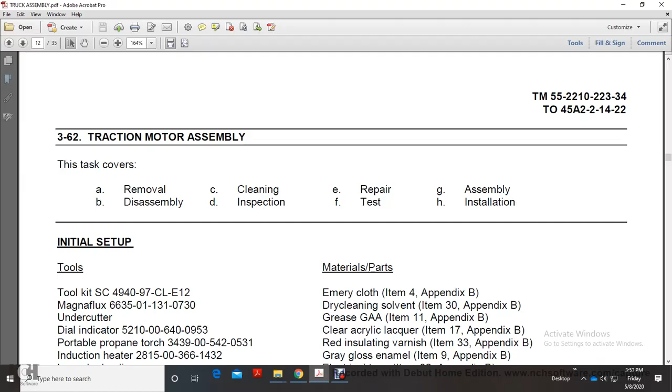Condition description: truck assembly removed. Removal warning: when the traction motor or under-locomotive equipment must be inspected while the engine is running. Remove excitation from the main generator, set air brakes, move the reverser to center position, remove from the controller to prevent accidental movement of the locomotive and possible injury to personnel.

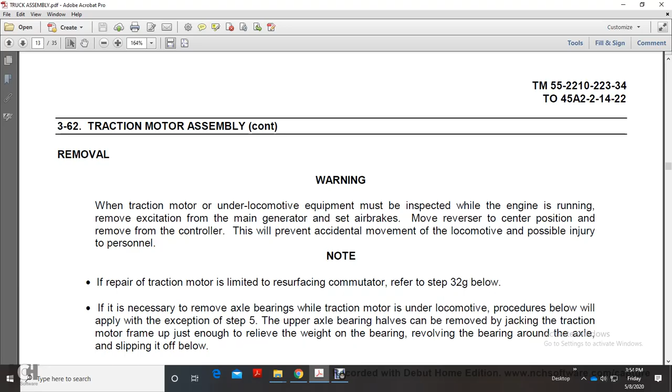Note: if the traction motor to be repaired is limited to resurfacing the commutator, refer to step 32g. If it's necessary to remove the axle bearings of the traction motor under the locomotive, the procedure below will be applied with the exception of step 5; the upper back axle bearing halves can be removed by jacking the traction motor frame just enough to relieve the weight on the bearing, revolving the bearing around the axle, and slipping it off.

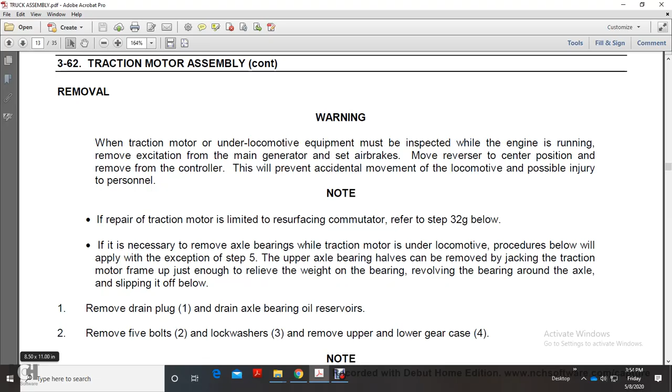Remove the drain plug to drain the axle bearing oil reservoirs only. Remove the five bolts (2), lock washer (3), rear upper and lower gear case (4). Note: the traction motor must be blocked with the wheels supported, and the wheels must be removed from the traction motor.

If the axle bearing cap (7) is stuck, a flat cold chisel may be used to loosen the cap. Place the chisel in the crack between the cap and the motor frame, and tap the cold chisel on one side or the other until the cap is loose. Remove the 8 bolts (5), lock washer (6), and axle bearing cap (7).

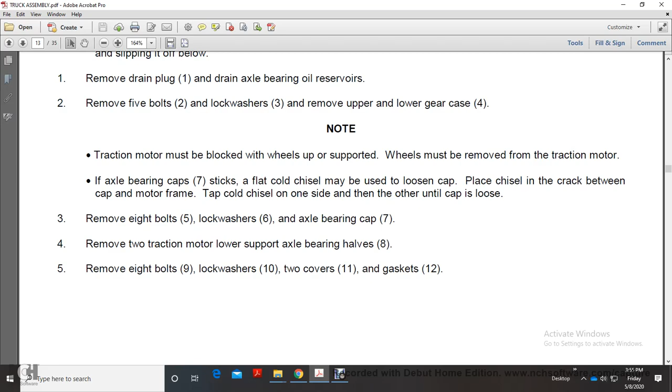Remove the two traction motor lower support axle bearing halves (8). Remove 8 bolts (9), lock washer (10), two covers (11), gaskets (12). Remove 4 bolts (13), lock washer (14), two felt wick lubricators (15).

Warning: components of the locomotive are heavy and awkward to handle. Use correct lifting procedures, including lift device assistance and other personnel, to avoid injury. Use a suitable lift device to slowly lift the traction motor (16) from the wheel and axle (17). Remove the traction motor upper support axle bearing halves.

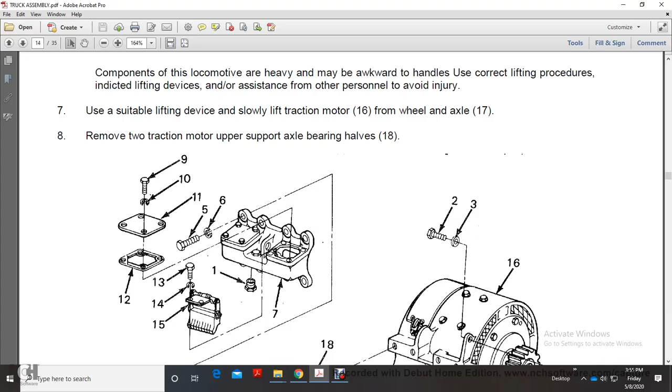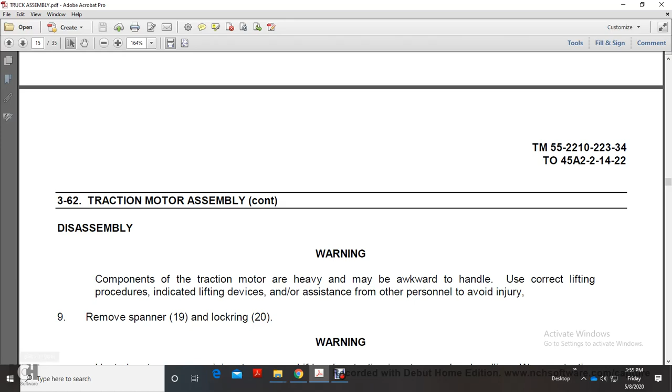Disassembly warning: components of the traction motor are heavy and may be awkward to handle. Use the correct lifting procedure, including lift device assistance with other personnel, to avoid injury. Remove spanner (19), lock ring (20).

Warning: heated parts may cause injury to personnel if hand protection is not worn. Wear protective goggles and gloves for maximum protection.

Original heat treatment will be affected if it becomes necessary to remove the pinion; it must then be scrapped. If it is very hard to pull, it may be necessary to apply heat to the pinion for a very short time. Pinion shafts and traction motors must not be heated, or damage to the parts will result.

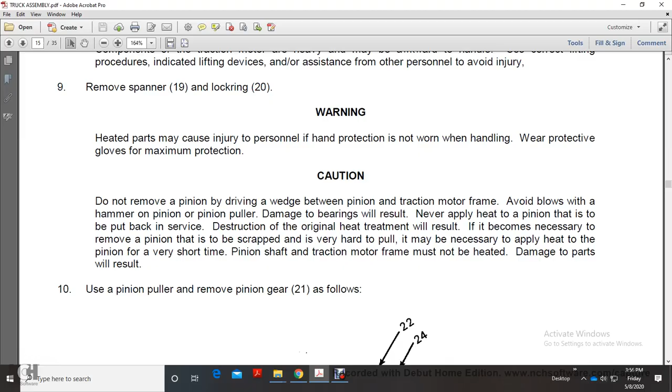Warning: dry cleaning solvent PD680 is toxic and flammable; wear protective goggles and gloves. Use only in a well-ventilated area. Avoid contact with skin and eyes. Do not breathe the vapor. Do not use near open flame.

Excessive heat: flash point of 100 to 138 degrees Fahrenheit. If you become dizzy, get fresh air immediately and get medical aid. If contact with eyes occurs, wash your eyes and get medical aid immediately.

Compressed air used for cleaning purposes must not exceed 30 psi. Do not direct compressed air against the skin. Use goggles and a full face shield.

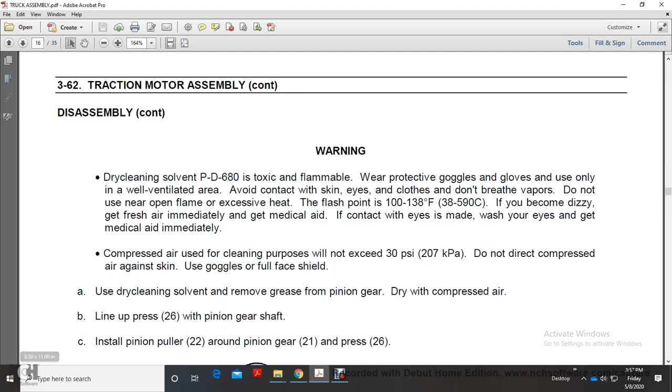Use dry cleaning solvent to remove the grease from the pinion gear, then dry with compressed air. Line up press 26 with the pinion gear shaft. Install the pinion puller around pinion gear (21). Press 26.

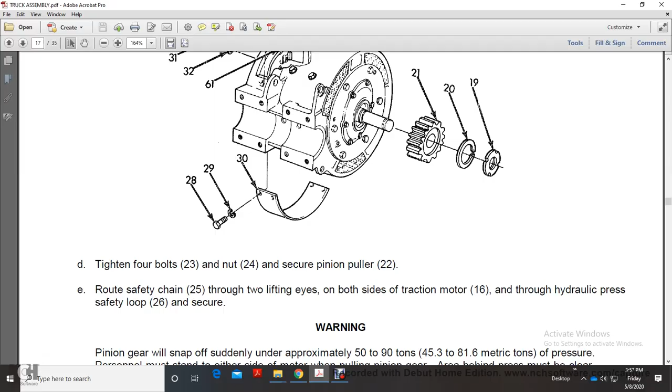Alright, then it shows your disassembly. Tighten 4 bolts 23, nut 24, secure pinion puller 22. Route safety chain 25 with the 2 lifting eyes, both sides of the traction motor 16 with the hydraulic press and safety loop 26. Secure.

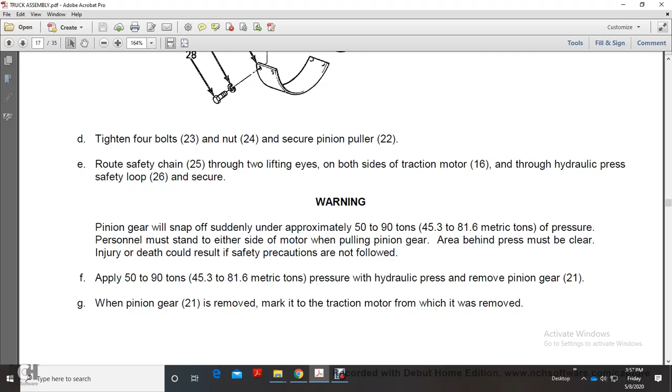Warning, pinion gear will snap off suddenly under approximately 50 to 90 tons of pressure. Personnel must stand either side of the motor pulling the pinion gear. Area behind the press must be clear. Injury or death can result if the safety precautions are not followed. Apply 50 to 90 tons of pressure with a hydraulic press. Remove the pinion gear 21. When the pinion gear 21 is removed, mark which traction motor it was removed from.

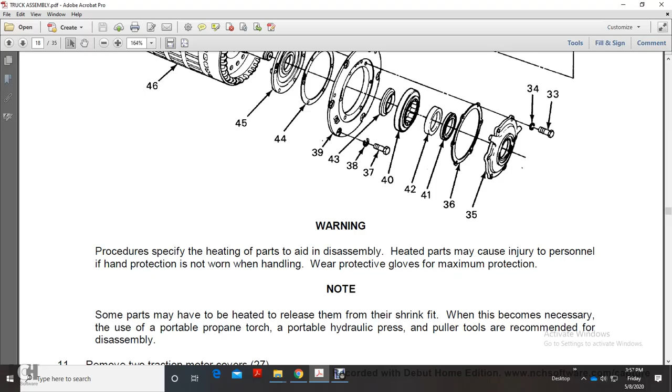And then it shows your traction motor pulled out. Warning, procedures specify heating of the parts for disassembly. Heated parts may cause injury to personnel; handle with protective gloves and maximum protection. Note some parts may be heated to release them from shrink fit. When this becomes necessary, use a portable propane torch and a portable hydraulic press. Puller tools are recommended for disassembly.

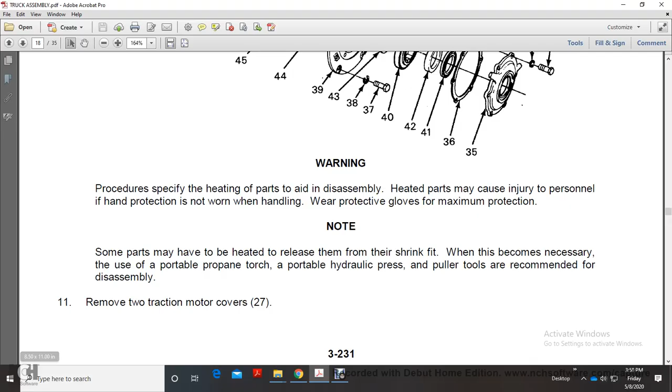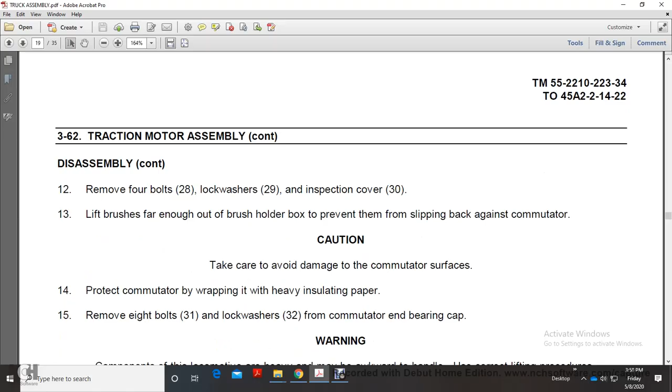Disassembly, remove 2 traction motor covers 27. Remove 4 bolts 28, lock washers 29, inspection cover 30. Lift brushes far enough out of the brush holder box. Prevent them slipping back against the commutator. Take care to avoid damage to the commutator surfaces. Protect the commutator by wrapping it with insulation paper. Remove the 8 bolts 31, lock washers 32 with the commutator end bearing cap.

Warning, components of the locomotive are heavy and may be awkward to handle. Use the correct lifting procedure, lifting device, or assistance from other personnel to avoid injury. Install lifting eye at the pinion end and use a suitable lifting device. Set the traction motor in vertical position. Remove 6 bolts 33, washer 34, bearing cap 35, gasket 36. Remove 6 bolts 37, the lock washer 38. Punch mark cover 39 and the traction motor frame 47.

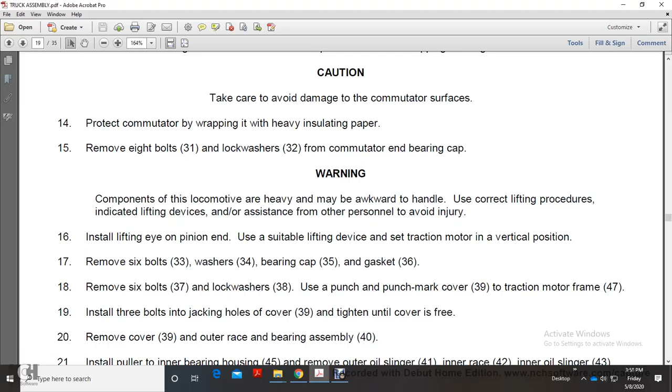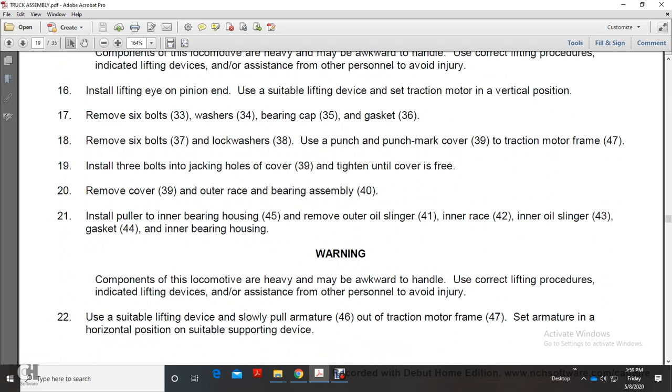Install 3 bolts in the jacking holes of cover 39. Tighten until the cover is free. Remove the cover 39 and outer race of the bearing assembly 40. Install puller on bearing housing 45. Remove oil slinger 41, inner race 42, inner oil slinger 43, gasket 44, inner bearing housing.

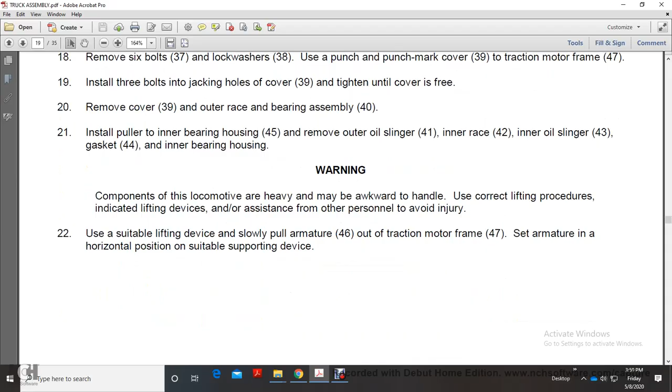Alright, warning, components of the locomotive are heavy and may be awkward to handle. Use correct lifting procedure, lifting device, or assistance from other personnel to avoid injury. With a suitable lifting device, slowly pull the armature out of the traction motor frame 47, then set the armature in a horizontal position on a suitable supporting device.

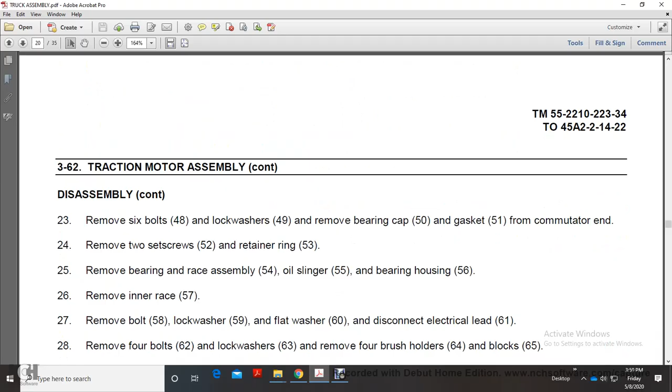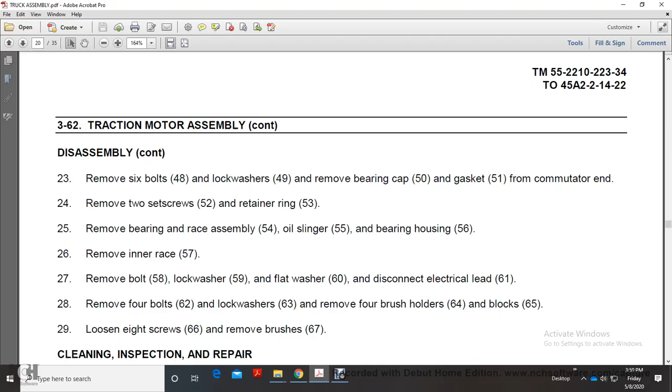Remove the 6 bolts 48, lock washer 49. Remove the bearing cap 50 with the gasket 51 at the commutator end and remove the 2 screws 52, retainer ring 53. Remove bearing race assembly 54, oil slinger 55, bearing housing 56. Remove the inner race 57. Remove bolt 58, lock washer 59, flat washer 60. Disconnect electrical lead 61. Remove 4 bolts 62, lock washer 63. Remove 4 brush holders 64 and block 65. Loosen 8 screws 66. Remove brushes 67.

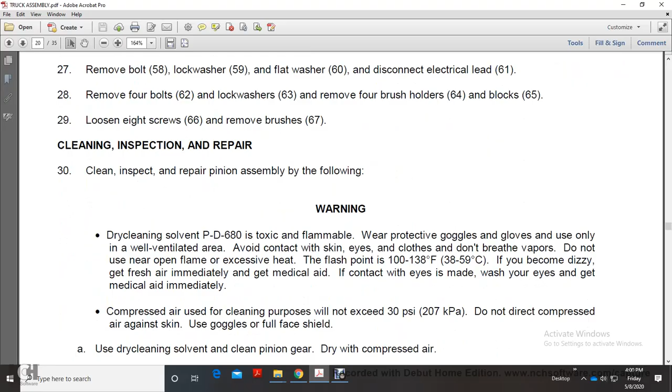Clean, inspect, repair pinion assembly by the following. Warning, dry cleaning solvent PD680 is toxic and flammable; wear protective goggles and gloves. Use only in a well ventilated area. Avoid contact with skin, eyes, clothes, and do not breathe vapor. Do not use near open flame or excessive heat. Flash point 100 to 138 degrees Fahrenheit. If you become dizzy, get fresh air and immediately get medical aid. If contact with the eyes, wash your eyes. Get medical aid immediately.

Compressed air used for cleaning purposes will not exceed 30 psi. Do not direct compressed air against the skin. Use goggles or full face shield. Clean pinion gear with dry cleaning solvent. Dry with compressed air. Magnaflux pinion gear. Inspect for cracks. No cracks allowed.

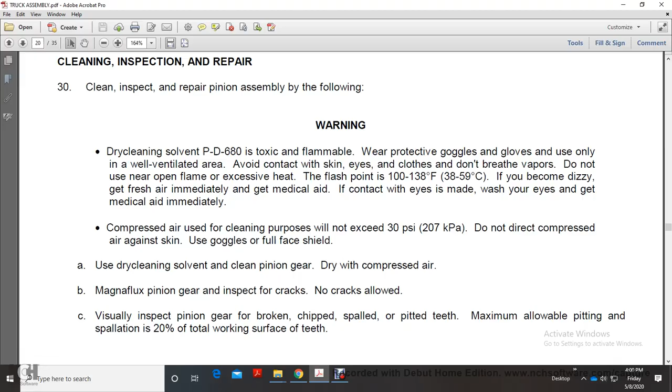Visually inspect pinion gear for broken, chipped, or pitted teeth; maximum allowable pitting or spalling is 20% of total working surface of teeth. Inside the bore of the pinion gear, surface must be smooth; polish with fine grade sandpaper. Replace pinion gear if damaged beyond repair. 31. Clean, inspect, repair bearing assembly by the following.

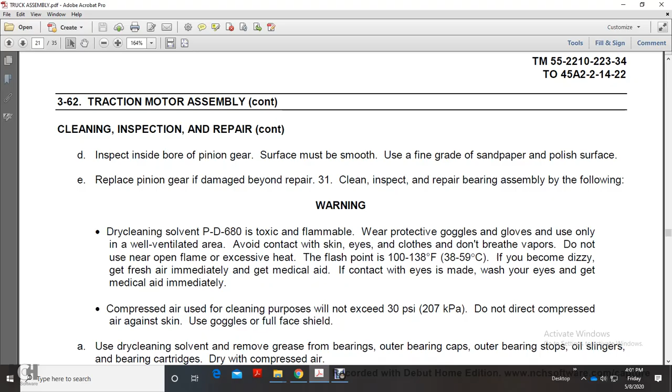Warning: dry cleaning solvent PD680 is toxic and flammable. Wear protective goggles and gloves, use only in a well ventilated area, avoid contact with skin, eyes, and clothes, and don't breathe vapors. Do not use near open flame or excessive heat; flash point is 100 to 138 degrees. If you become dizzy, get fresh air and immediately get medical aid. If contact with the eyes, wash your eyes and get medical aid immediately. Compressed air used for cleaning purposes will not exceed 30 psi.

Do not direct air across skin; use goggles or full face shield. Use dry cleaning solvent to remove the grease on the bearings, outer bearing caps, outer bearing stops, and oil slinger with the bearing cartridge. Dry with compressed air. Inspect for wear, cracks, or breaks, inspect rollers for cracks or pits, and inspect parts for discoloration indicating overheating. Replace parts that are damaged. Note: do not paint machine surfaces; paint bearing housing with red insulation varnish.

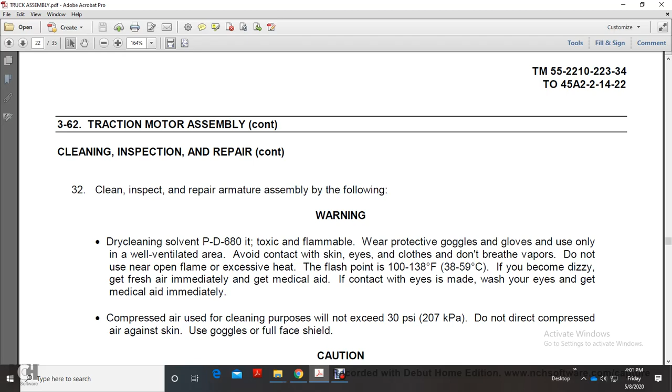Flash point 138 degrees Fahrenheit. If you become dizzy, get fresh air and immediately get medical aid. In contact with the eyes, wash and get medical aid immediately. Compressed air for cleaning purposes is not to exceed 30 psi. Do not direct compressed air against skin. Use goggles or full face shield. Caution:

Check that dry cleaning solvent is not used on the commutator copper parts or coil wires; damage to this equipment will result. Blow out the armature assembly with compressed air, directing air through the openings in the armature. Remove the internal accumulation of dirt with a dry cloth dampened with dry cleaning solvent. Wipe the armature surface to remove external grease and dirt. Dry with compressed air. Inspect the shaft.

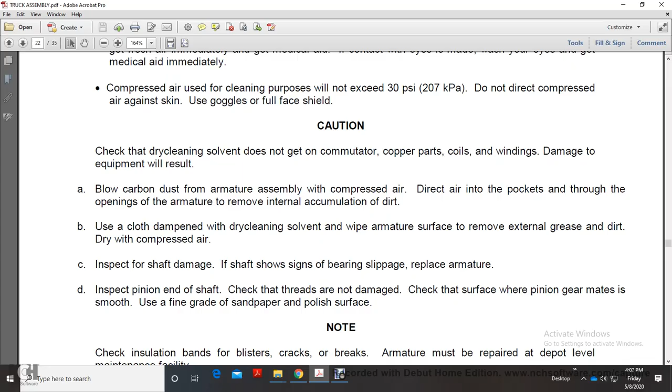If the shaft shows signs of bearing slippage, replace the armature. Inspect the pinion end of the shaft and check that the threads are not damaged. Check that the surface where the pinion gear mates is smooth; polish with fine grade sandpaper. Check the insulation bands for blisters, cracks, or breaks; the armature must be repaired at a depot level maintenance facility. Inspect that the varnish surface, coil insulation, bands, tightened screws, and soldering are intact.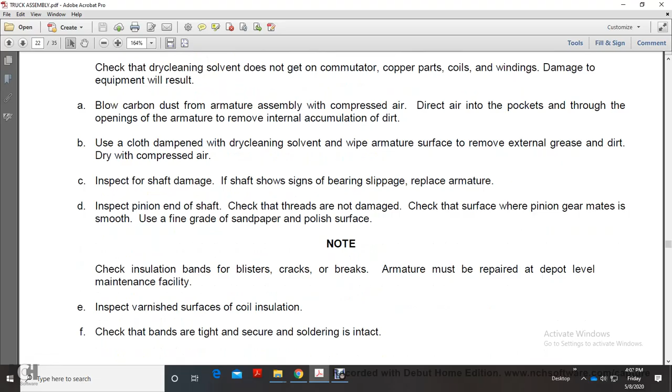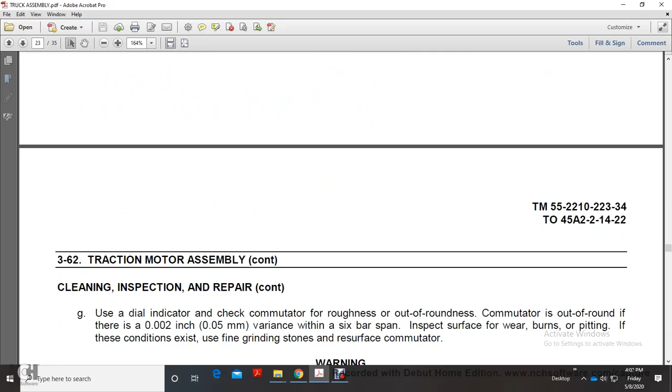Use a dial indicator to check commutator out-of-roundness. Commutator out-of-roundness should be within 0.002 inch variance over a 6-bar span. Inspect the surface for wear, burns, and pits. If these conditions exist, use a fine grade grindstone and resurface the commutator.

Warning: if the traction motor or under-locomotive equipment must be inspected with the engine running, remove the excitation from the main generator, set air brakes, move the reverser to the center position, and remove it from the controller. This will prevent accidental movement of the locomotive and possible injury to personnel.

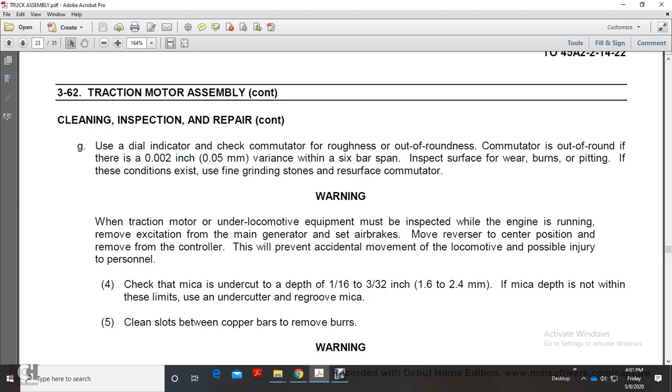Check mica undercut depth of 1/16 to 3/32 inch. If mica depth is not within these limits, undercut and regroove the mica. Clean slots between the copper bars and remove burrs. Warning: compressed air used for cleaning is not to exceed 30 psi. Do not direct compressed air against skin. Use a full face shield to prevent injury. Use dry compressed air to remove the loose mica and copper from the commutator.

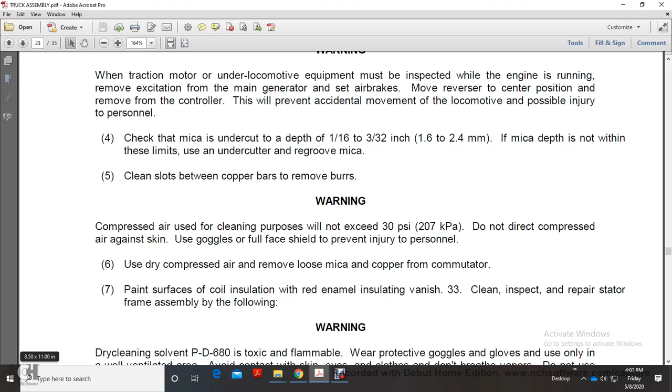Paint surfaces of coil insulation with red enamel insulating varnish. Clean, inspect, and repair the stator frame as follows. Warning: dry cleaning solvent PD680 is toxic and flammable. Wear protective goggles and gloves, use only in a well ventilated area, avoid contact with skin, eyes, and clothes, and do not breathe vapor. Do not use near open flame or excessive heat. Flash point is 100 to 138 degrees. If you become dizzy, get fresh air and immediately get medical aid. If in the eyes, wash your eyes and get medical aid immediately.

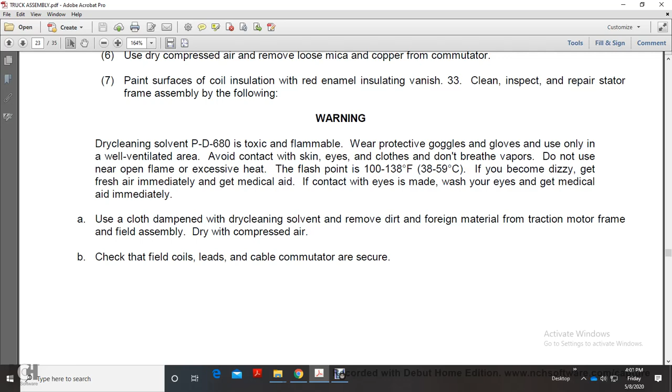Use a cloth dampened with dry cleaning solvent to remove dirt and foreign material from the traction motor frame and field assembly. Dry with compressed air. Check that the field coil leads and cable to the commutator are secure. Check that shunt and interpole fields are tight, and paint insulation with red insulation varnish. Clean, inspect, and repair the brush holder assembly as follows.

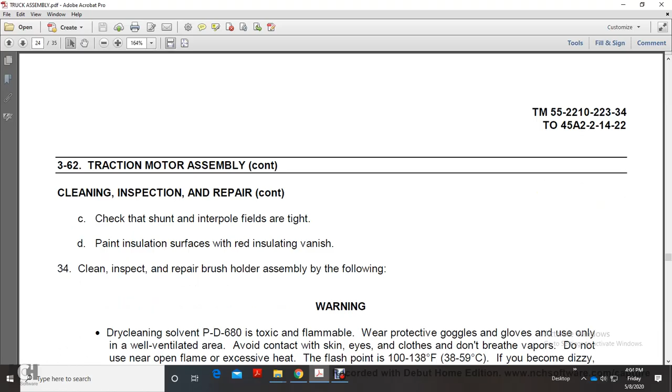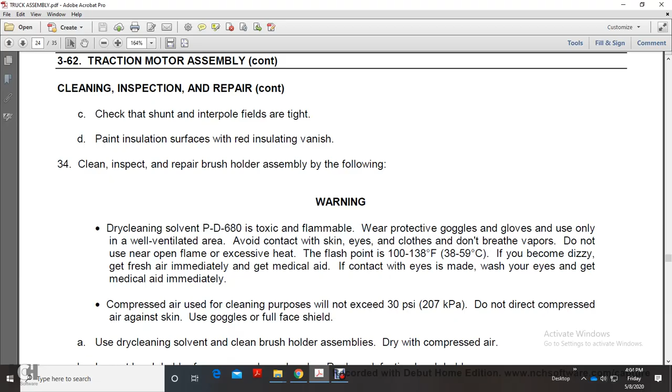Warning: dry cleaning solvent PD680 is toxic and flammable. Wear protective goggles and gloves. Use only in a well ventilated area. Avoid contact with skin, eyes, and clothes, and do not breathe vapors. Do not use near open flame or excessive heat; flash point is 100 to 138 degrees Fahrenheit. If you become dizzy, get fresh air immediately and get medical aid. On contact with the eyes, wash and get medical aid immediately. Compressed air for cleaning purposes does not exceed 30 psi. Do not use compressed air against skin.

Use goggles or full face shield. Clean with dry cleaning solvent and clean brush holder assemblies, then dry with compressed air. Inspect the brush holder for wear, cracks, or breaks, and replace defective brush holders. Inspect insulators for breaks, cracks, burns, or damaged surfaces. Replace the defective insulator by pressing off the studs and pressing on new ones.

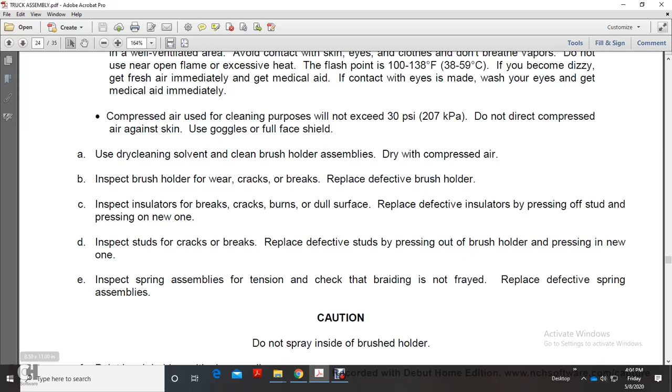Inspect studs for cracks or breaks; replace the defective studs, pressing out the brush holders and pressing in the new ones. Inspect spring assemblies for tension and check that braiding is not frayed; replace the defective spring assembly. Caution: do not spray inside of the brush holder. Paint brush holders with clear acrylic paint.

Inspect gear case by the following. Warning: dry cleaning solvent P-D-680 is flammable. Wear protective goggles and gloves. Use only in a well ventilated area. Avoid contact with the skin, eyes, and clothes, and do not breathe vapor. Do not use near open flame or excessive heat. Flash point of 100 to 138 degrees Fahrenheit. If you become dizzy, get fresh air immediately and get medical aid. If contact with the eyes is made, wash your eyes.

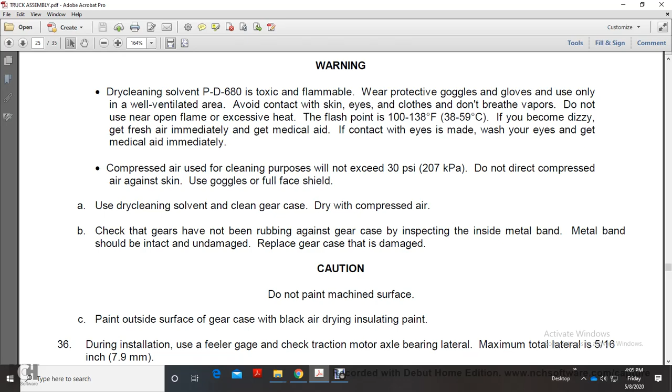Get medical aid immediately. Compressed air used for cleaning purposes must not exceed 30 psi. Do not direct compressed air against skin. Use goggles or full face shield. Use dry cleaning solvent to clean gear case, dry with compressed air. Check whether the gears have been rubbing against the gear case. Inspect inside metal band. Metal band shall be intact and undamaged. Replace gear case if damaged.

Caution: do not paint machined surfaces. Paint outer surface of the gear case with black air drying insulation paint. During installation, use feeler gauge to check traction motor axle bearing lateral. Maximum total lateral play is 5/16 of an inch.

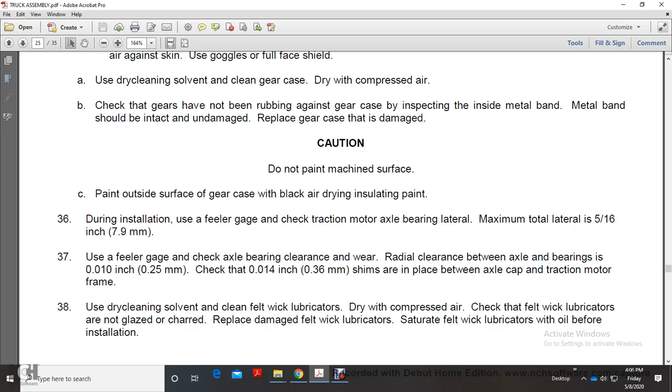Using feeler gauge, check axle bearing clearance; radial clearance between axle and bearing is 0.010 of an inch. Check that 0.014 inch shims are placed between the axle cap and the traction motor frame. Use dry cleaning solvent to clean felt wick lubricators, dry with compressed air. Check that the felt wick lubricators are not glazed or charred. Replace damaged felt lubricators, and saturate the felt wick lubricators with oil before installation.

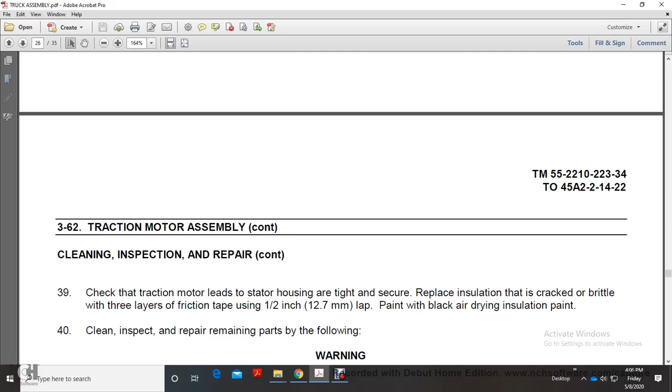Check traction motor lead and housing are tight and secure. Replace insulation that is cracked or brittle with 3 layers of friction tape with a 1/2 inch lap, and paint with black air drying insulation paint. Clean, inspect, and repair remaining parts as follows.

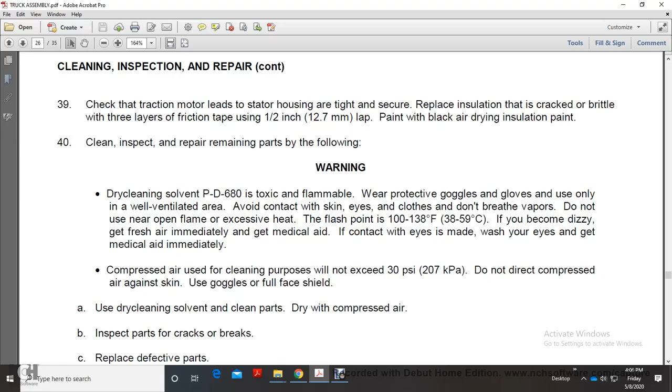Warning: dry cleaning solvent P-D-680 is toxic and flammable. Wear protective goggles and gloves, use only in a well ventilated area, avoid contact with the skin, eyes, and clothes, do not breathe vapor, do not use near open flame or excessive heat. Flash point is 100 to 138 degrees Fahrenheit. If you become dizzy, get fresh air immediately and get medical aid. If contact with the eyes is made, wash your eyes and get medical aid immediately. Compressed air used for cleaning purposes must not exceed 30 psi. Do not direct compressed air against skin. Use goggles or full face shield. Use dry cleaning solvent to clean parts, dry with compressed air.

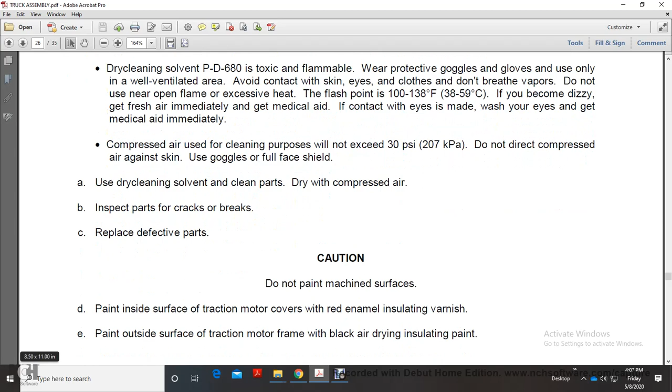Inspect parts for cracks or breaks. Replace defective parts. Caution: do not paint machined surfaces. Paint inside surfaces of the traction motor cover with red enamel insulation varnish. Paint outside surface of the traction motor frame with black air drying insulation paint. Refer to table 3.7, the traction motor data.

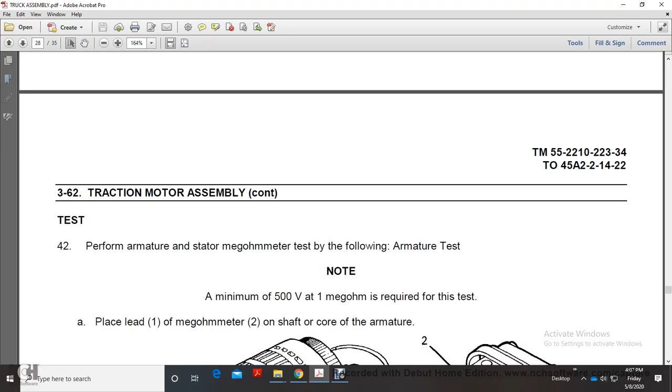Armature and stator megohmmeter testing. Armature test. Note, a minimum 500 volt, 1 megohm meter is required for the test. Place lead 1 of the megohmmeter on the shaft core of the armature. Place lead 2 of the megohmmeter on the commutator bars. Note the reading of the megohmmeter. Continue with each successive bar around the commutator.

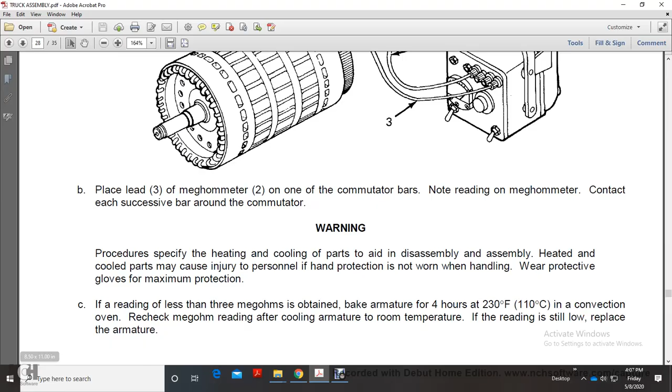Warning: procedures specify heating and cooling of parts. Handling heated or cooled parts can cause injury to personnel if protection is not worn. Wear protective gloves for maximum protection. If a reading less than 3 megohms is obtained, bake the armature 4 hours at 230 degrees in a convection oven. Recheck megohmmeter reading of the armature at room temperature. If the reading is still low, replace the armature.

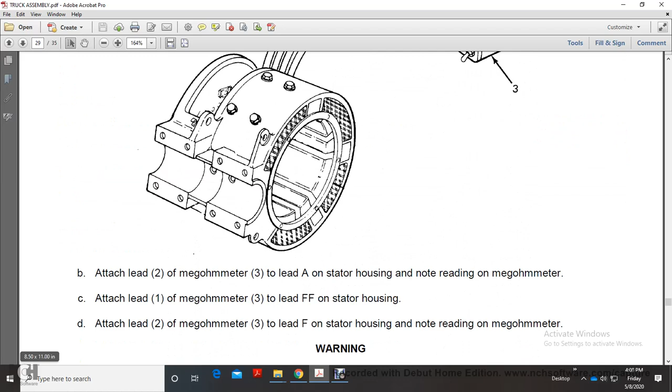Stator test: attach lead 1 of the megohmmeter to lead AA on the stator housing. Attach lead 2 of the megohmmeter to lead A on the stator housing, note reading on megohmmeter. Attach lead 1 of the megohmmeter to lead FF on the stator housing. Attach lead 2 of the megohmmeter to lead F of the stator housing, note reading on megohmmeter. Warning: procedures specify heating and cooling of parts.

Disassembly of heated or cooled parts may cause injury to personnel if hand protection is not worn in handling. Wear protective gloves for maximum protection. If reading is less than 3 megaohms, bake the stator 4 hours at 230 degrees in a convection oven. Recheck meter after cooling to room temperature, and if the readings are still low, replace stator.

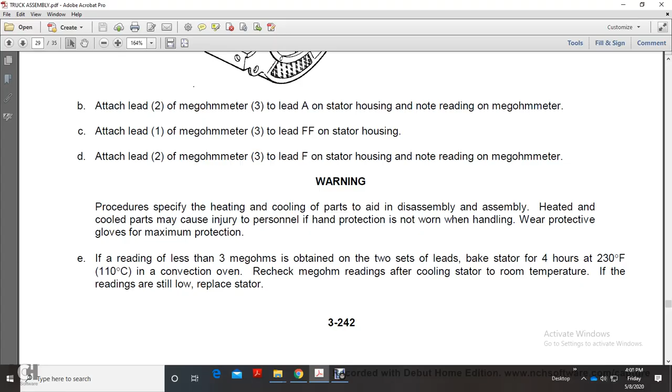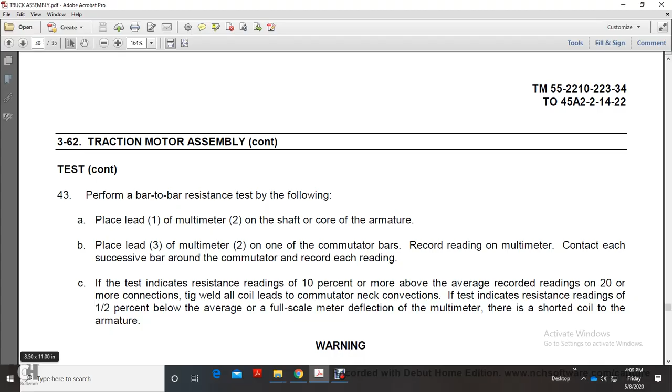Warning. Procedures specify heating and cooling of parts. Disassembly of heated or cooled parts may cause injury if hand protection is not worn in handling. Wear protective gloves for maximum protection. Below average readings indicate the presence of water in the coils. If below average readings are obtained, bake the armature in a convection oven for 4 hours at 230 degrees. Cool to room temperature. Repeat step B. If the readings are still low, replace armature.

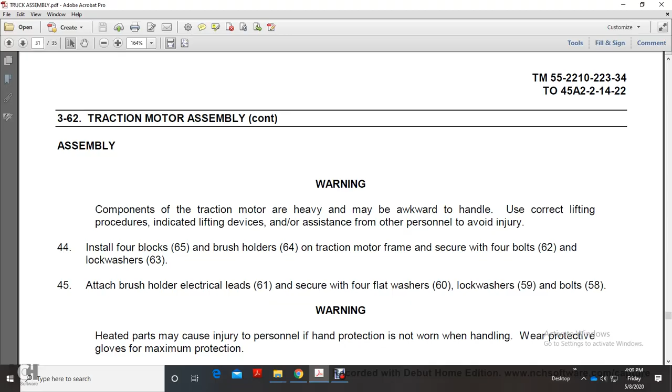Assembly. Warning. Components of the traction motor are heavy and may be awkward to handle. Use correct lifting procedures, a lifting device, or assistance from other personnel to avoid injury. Install 4 blocks 65 and brush holder 64 in traction motor frame with 4 screws, bolt 62, and lock washer 63. Attach brush holder electrical lead 61 with 4 flat washers 60, lock washers 59, and bolts 58. Warning. Heated parts may cause injury to personnel if hand protection is not worn in handling. Wear protective gloves for maximum protection.

Place inner race 57 in the induction heater. Heat parts to 212 degrees Fahrenheit. Remove inner race from the heater. Install on the armature shaft. Hold in place until cool. Place oil slinger 55 in induction heater. Heat to 212 degrees Fahrenheit. Remove oil slinger from the heater. Install on armature shaft against the shoulder. Hold in place until cool.

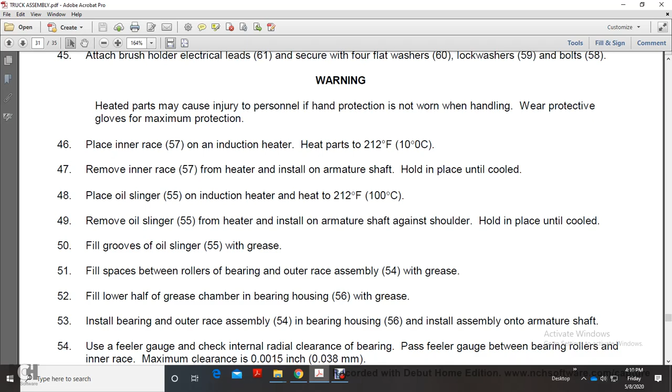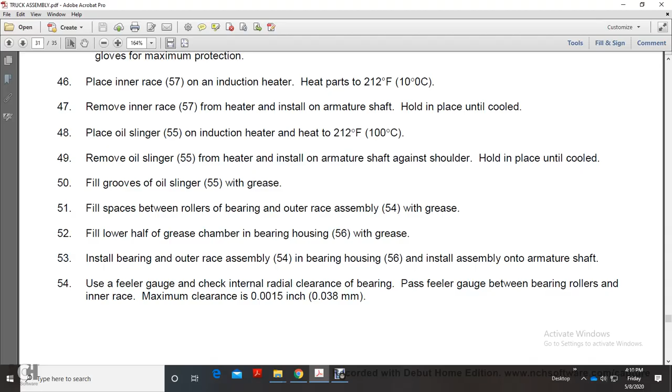Fill grooves of oil slinger 55 with grease. Fill spaces between the rollers of bearing outer race assembly 54 with grease. Fill the lower half of the grease chamber in bearing housing 56 with grease. Install bearing outer race assembly 54 in bearing housing 56. Install assembly on the armature shaft. Using a feeler gauge, check internal radial clearance of bearing. Pass the feeler gauge between the bearing rollers and inner race; maximum clearance 15/10,000 of an inch.

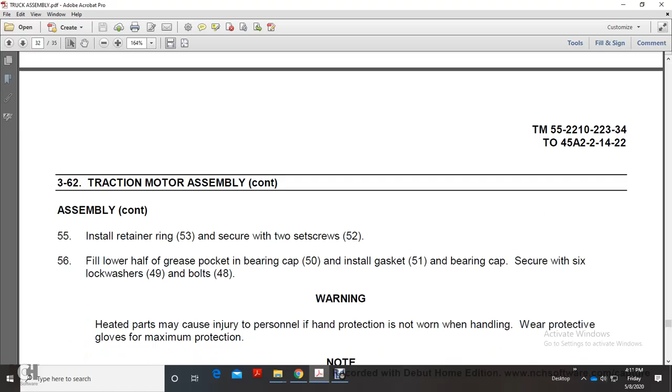Install retainer ring 53 and secure with 2 setscrews. Fill the lower half of the grease pocket in bearing cap 50 and install gasket 51 and bearing cap. Secure with 6 lock washers 49 and bolts 48. Warning, heated parts may cause injury to personnel if hand protection is not worn. Wear protective gloves for maximum protection. Parts must be heated.

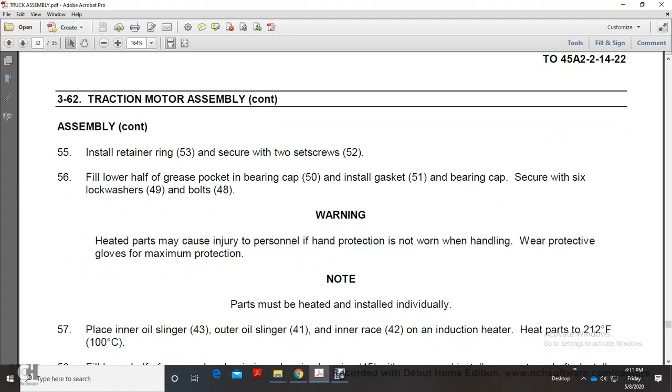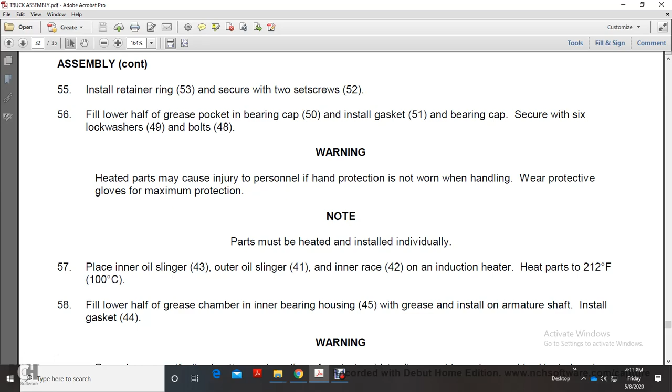Fill the lower half of the grease chamber in inner bearing housing 45 with grease. Install on armature shaft. Install gasket 44. Procedures specify heating and cooling of parts in disassembly. Disassembly of heated or cooled parts may cause injury if hand protection is not worn in handling. Wear protective gloves for maximum protection. Remove the inner oil slinger from the heater and install on armature shaft. Hold in place until cool. Fill sealing grooves with grease.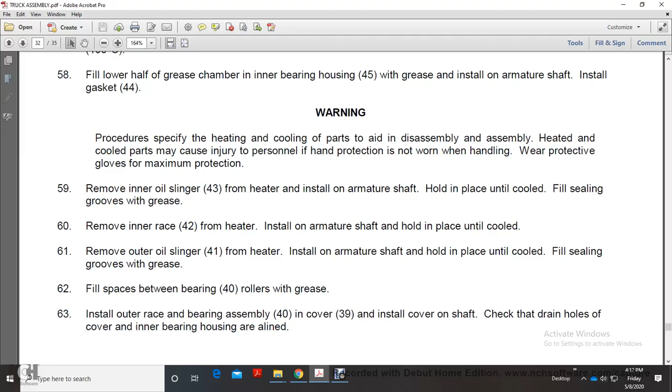Remove inner race 42 from the heater and install on armature shaft. Hold until cooled. Remove outer oil slinger from the heater. Install on armature shaft. Hold in place until cool. Fill sealing grooves with grease. Fill spaces between rollers 40 with grease. Install bearing assembly 40 and cover 39 on the shaft. Check that the drain holes of the cover and inner bearing housing line up.

Alright, install 2 guide bolts for the inner bearing housing 45, aligning the bearing housing, commutator end cover 39. Feeler gauge: check internal radial clearance of the bearing. Feeler gauge between rollers and inner race, maximum radial clearance of 3 thousandths of an inch. Fill the lower half of the grease chamber of the bearing cap 35 with grease. Install gasket 36 with the bearing housing cap.

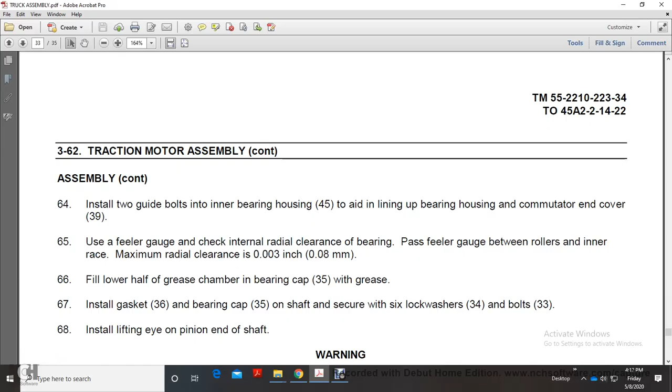On shaft, secure 6 lock washers 34, bolts 33. Install lifting eye on the pinion end of the shaft. Warning: components of the locomotive are heavy and may be awkward to handle. Use correct lifting procedure with lifting device and assistance from other personnel to avoid injury. Use suitable lifting device. Slowly lower the armature assembly 46 into the traction motor frame 47.

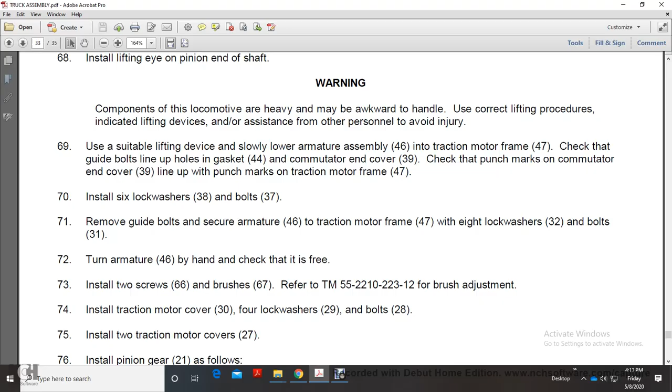Install 2 cap screws 66, brush 67, refer to TM 55-2210-223-12, brush adjustment. Install traction motor cover 30, lock washer 29, bolt 28. Install traction motor cover 27. Install pinion gear 21 as follows: coat shaft lightly with Prussian blue, install pinion gear on the armature shaft, give it a quick push and set against the traction motor cover, lightly drive a wedge between the pinion gear and the traction motor cover, remove pinion gear.

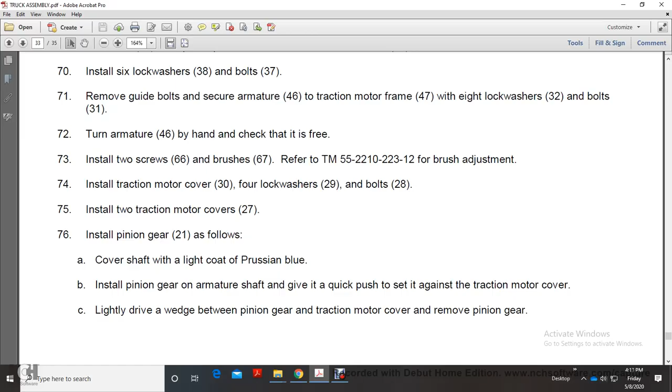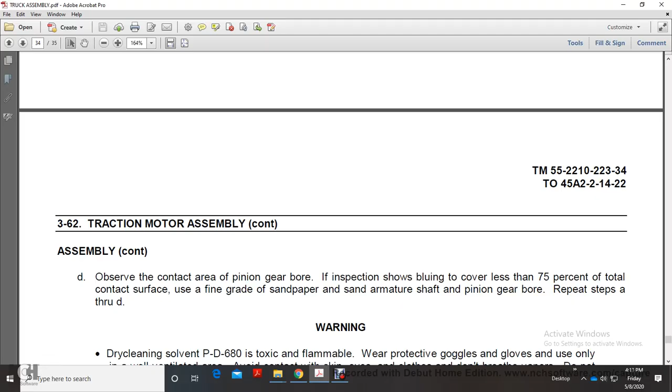Observe the contact area of the pinion gear bore. If blue covers less than 75% of the total contact surface, with fine grade sandpaper, sand armature shaft and pinion gear bore. Repeat steps A through D. Warning: dry cleaning solvent P-D-680.

Toxic, flammable. Wear protective goggles and gloves. Use only in well ventilated areas. Avoid contact with skin and eyes. Do not breathe the vapors. Do not use near open flame or excessive heat. Flash point of 100 to 138 degrees Fahrenheit. If you become dizzy, get fresh air. Immediately get medical aid. If contact with the eyes is made, wash eyes. Get medical aid immediately.

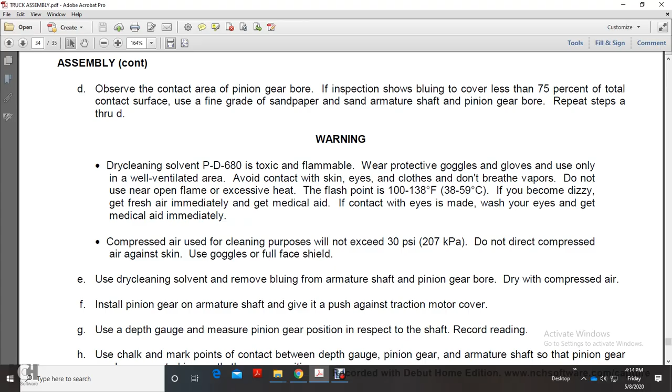Compressed air used for cleaning purposes is not to exceed 30 psi. Do not direct compressed air against skin. Use goggles or full face shield. Dry cleaning solvent for removal of the blue from armature shaft and pinion gear bore. Dry with compressed air. Install pinion gear on armature shaft. Give it a push against traction motor cover.

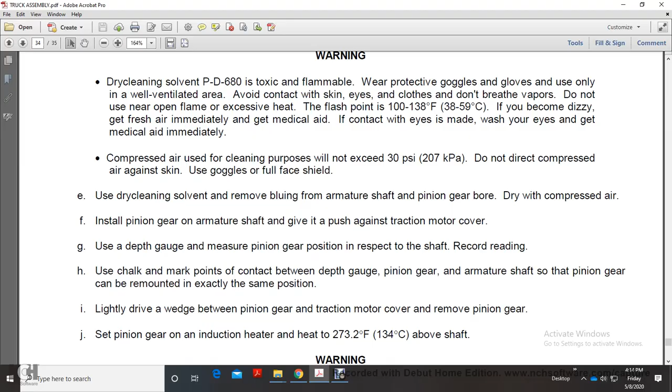Depth gauge: measure pinion gear position with respect to the shaft. Record reading. Chalk mark the contact between the depth gauge, pinion gear and armature shaft so the pinion gear can be remounted in exactly the same position. Lightly drive the wedge between the pinion gear and traction motor cover to remove the pinion gear. Heat pinion gear in induction heater set to 273.2 degrees Fahrenheit above the shaft. Warning: heated parts may cause injury to personnel. Use hand protection when handling. Wear protective gloves.

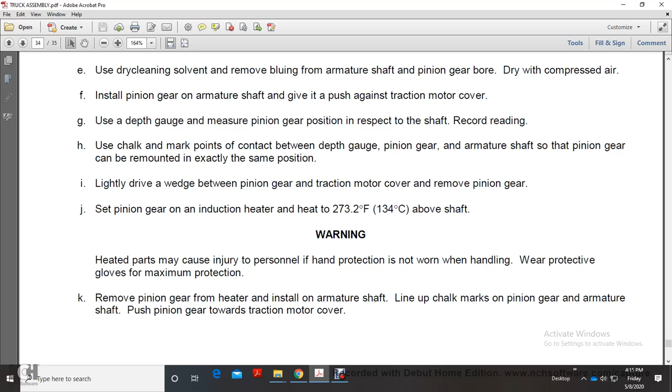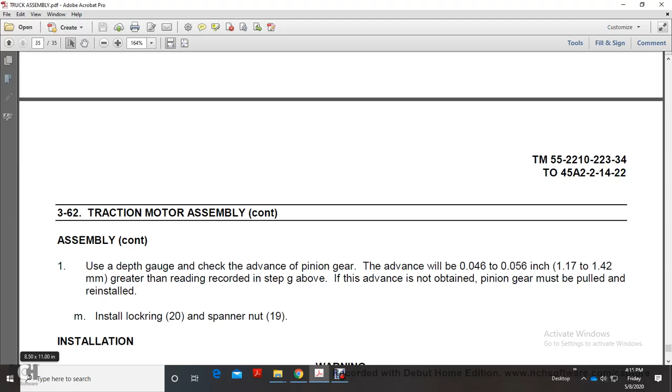Remove pinion gear from heater. Install on armature shaft. Line up chalk marks on pinion gear and armature shaft. Push pinion gear toward traction motor cover. Use depth gauge, check pinion gear advance of 46 to 56 thousandths of an inch greater than reading recorded in step G above. If advance is not obtained, pinion gear must be pulled and reinstalled. Install lock ring 20, spanner nut 19.

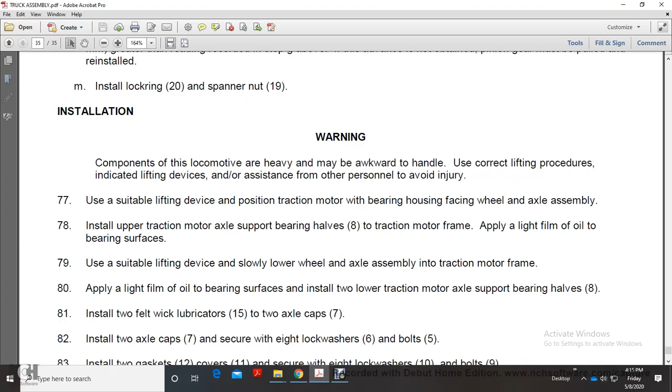Installation. Warning: components of the locomotive are heavy and may be awkward to handle. Use correct lifting procedure with lifting device and assistance from other personnel to avoid injury. Use suitable lifting device: traction motor, bearing housing, wheel and axle assembly. Use the upper traction motor axle support bearing halves to the traction motor frame. Apply light film of oil to the bearing surface. Slowly lower the wheel and axle into the traction motor frame. Apply light film of oil to the bearing surface.

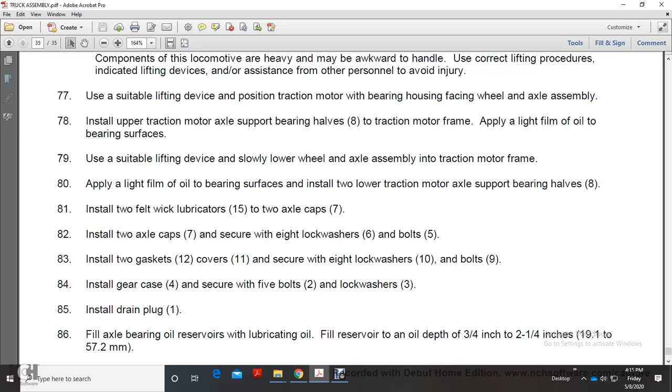Install the 2 lower traction motor axle bearing halves 8. Install 2 felt wick lubricators 15 on 2 axle caps 7. Install the 2 axle caps 7, 8 lock washers 6, bolts 5. Install gaskets 12, cover 11, 8 lock washers 10, bolts 9. Install gear case 4, 5 bolts 2, lock washers 3. Install drain plug 1.

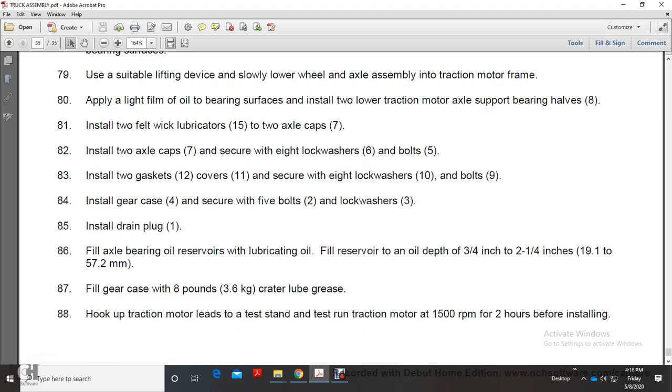Fill axle bearing oil reservoirs with lubricating oil. Fill reservoir oil depth 3/4 inch to 2-1/4 inches. Fill gear case with 8 pounds of crater lube grease. Hook traction motor to the test stand. Test run traction motor at 1500 RPM for 2 hours before installing. And that was your traction motor assembly.